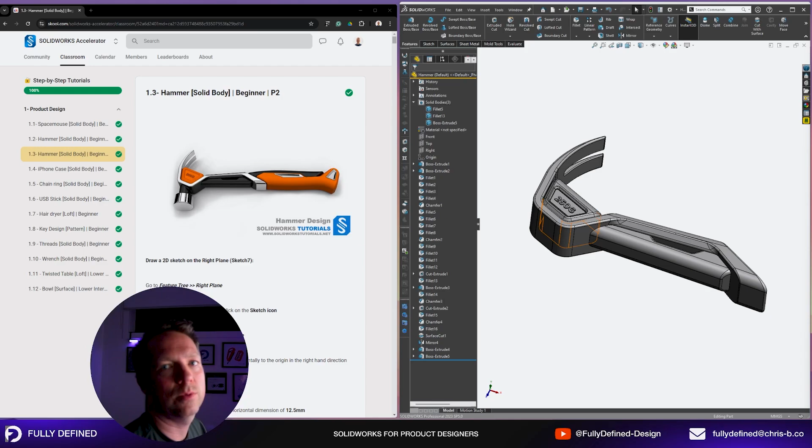All right, let's continue on. First off, I'm just going to grab all of these features and put them in a folder, label that part 1, so we can see where we started from and what we've added to get to the final image you can see on the screen.

I'll continue to do this the same way I did the first video, so I'm not going to read everything. I'm going to look at the main sketches and features and interpret that in my own way, and try to follow it as closely as I can, but if I've got some tips or advanced tricks based on this, I'll let you know.

So we're doing a sketch on the right plane here. Draw a center line. Now, before I draw a center line, I want to see why, because I know in the previous tutorial he drew a center line and then drew a center point straight slot. We don't need to do that. We can just do our slot, and we can see those dotted lines highlighted there, showing you that it's going to reference the origin, but not add a relation to it.

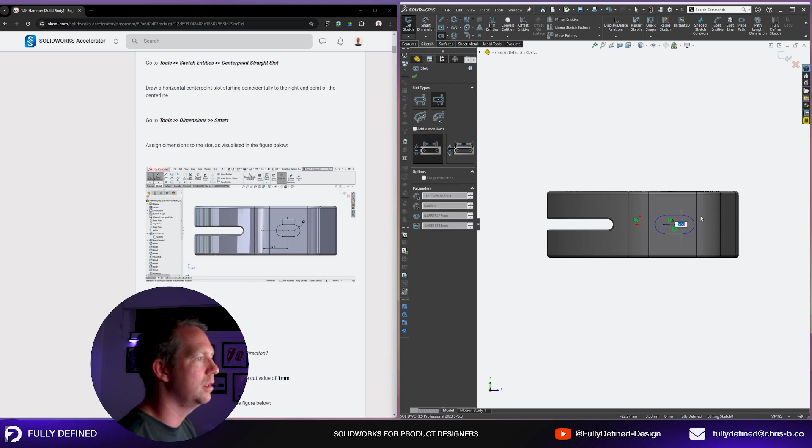But we can go in and add the relation afterwards. So I can press escape here, hold control, click on the origin and that center point, and make it horizontal, and add a dimension here. So I don't need that extra step of adding that construction line.

I'll continue to put in the dimensions, and going to do an extruded cut. It's 1 millimeter. Now, flip that direction to make sure it's going down into the object. And that's done.

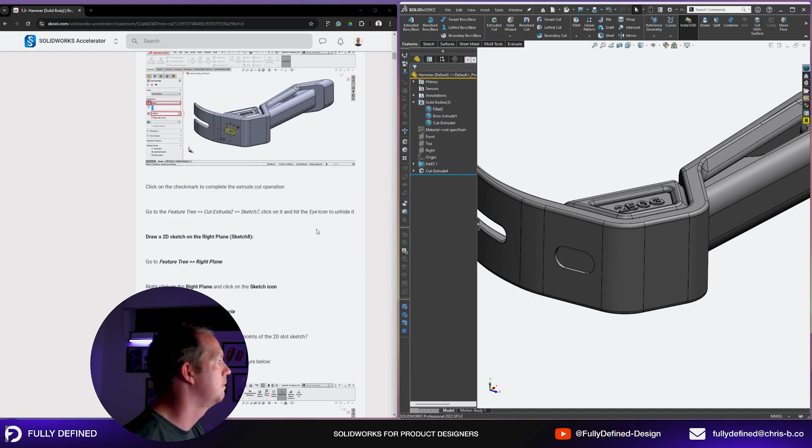Something about hiding some stuff, I'm just going to skip that, and going down to the next. Okay, so we're going to do another sketch on the right plane.

Normal To - now normal to takes me to the wrong view that I want to see here. I want to be around 180 degrees. You can change your views by pressing your arrow keys. By default it'll move 15 degrees with each turn, I believe. If you hold shift, though, it will go 90 degrees. So if I hold shift and press 2 arrow keys, that'll go 180 degrees around - there's a little trick.

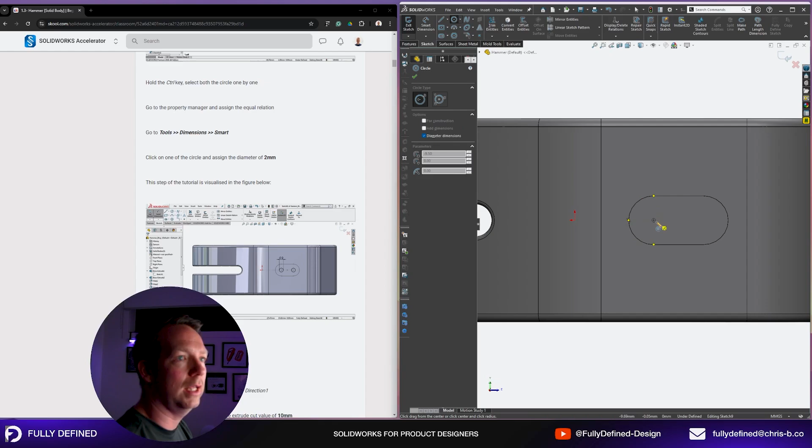Here we're drawing 2 circles, each with a 2 millimeter dimension. Now, when you're drawing a circle inside a shape that's already round, like this slot, if you hover over the edge of the slot, it's going to bring up the center point of the circle, and you can click and drop your circle onto that center point.

I'm going to select both circles and make them equal because they're both 2 millimeters. And this is an extruded cut - we're going to extruded cut that's 10 millimeters. So press 10, flip my direction, and OK.

We're doing another circle here, and it looks like we're adding a kind of fixing on the top. Again we're drawing on the right plane. Now, why we're drawing on the right plane is because it is touching this face here - this face is the right plane. But if we moved our hammer and made a change later, and it was no longer on the right plane, then this cut might not work. So if we're referencing geometry, like we want it to start from this face, it's better to sketch on this face than it is to sketch on the plane.

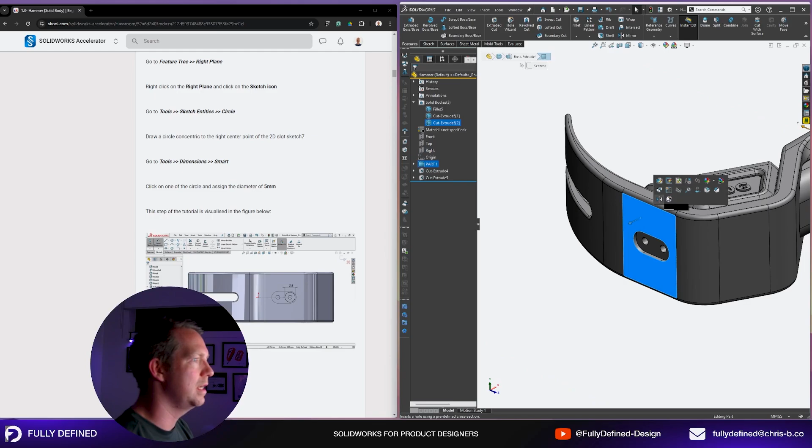So for this next step, I'm going to hit sketch using that face and then follow the step. So here, put my circle, make that 5. Extrude down 1 millimeter. Now, if I want to extrude to that surface, which is 1 millimeter away like this, I don't have to go 1 millimeter here. And if I do that and the depth of that cut changes later...

...then I'm going to either have a gap or an interference. Best thing to do here is go up to surface and select that face, and then it's going to go up to that face wherever that face ends up being. Uncheck merge result and press OK.

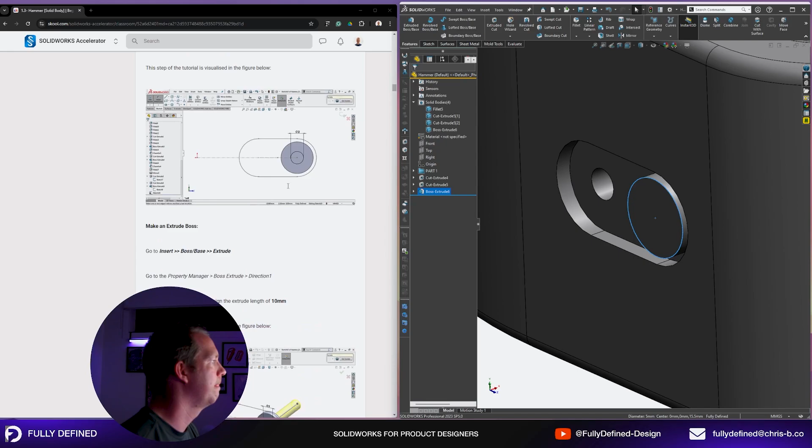Always keep going through. So we're trying to make like a pin. Yeah. All right. Now here's another little trick I can show you. If we're using a sketch, or we want to create a sketch that's got the same dimensions as something already there, we don't have to sketch it again.

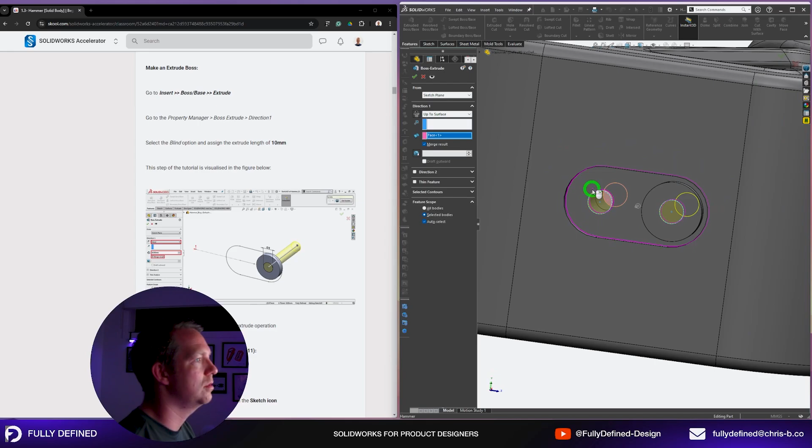We can either use the existing sketch or we can convert entities. There's no need for me to do this step here. Click on one of the circles, assign a diameter. Don't need to do that. I could actually just click this sketch here, click extrude. Again, I could go up to surface. So I could say that surface, which is down there, which is 10 millimeters away.

Now, the only difference here, I don't want to do two circles, just one. So I can go selected contours, clear selections, and just select the one on the right. It's just going to do that side. Now, it doesn't say whether or not this one is wanting to merge. He's got merge selected here in the image, so I'm going to merge it.

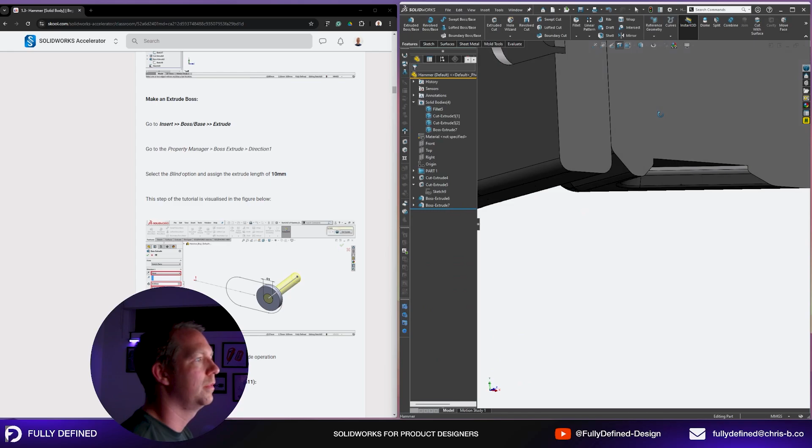But when I do, because I haven't isolated, in the feature scope, if I just move my head, you can see it's over on the right. I'm going to uncheck auto select, and then select this body to merge to. So it's going to merge to this one. Okay. So now if we do a section view that's going through that, you can see the result we've got there. This is all one solid body, going through these two parts.

All right, so let's keep going. Another circle, and what's this one? An extruded cut. So there's an error there with the dimension, I believe. It looks like a cut of 0.5 of a millimeter. And then we're going to add some chamfers. Okay, so how big's the circle? 3. So we're going to go sketch on this face.

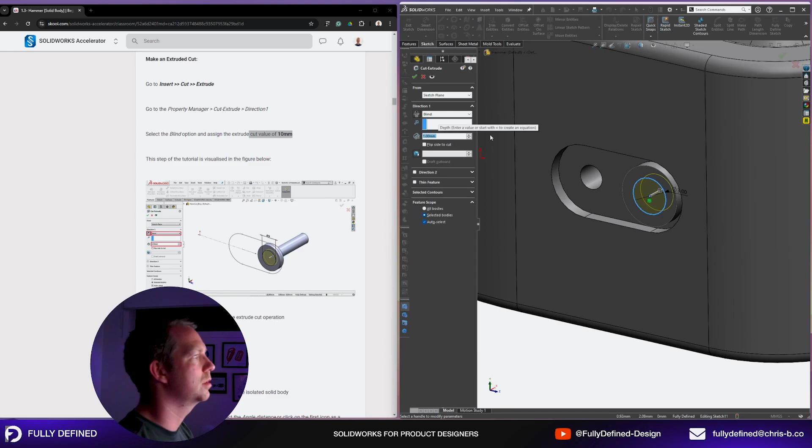There was the gesture, if you missed that: right click, drag to my circle. Find the center point. Do an extruded cut, 0.5 of a millimeter. And now I'm going to isolate that body and do some chamfers. These are 0.25 mil chamfers on one face and one edge. Select the face and the edge, select chamfer. Put in the dimension.

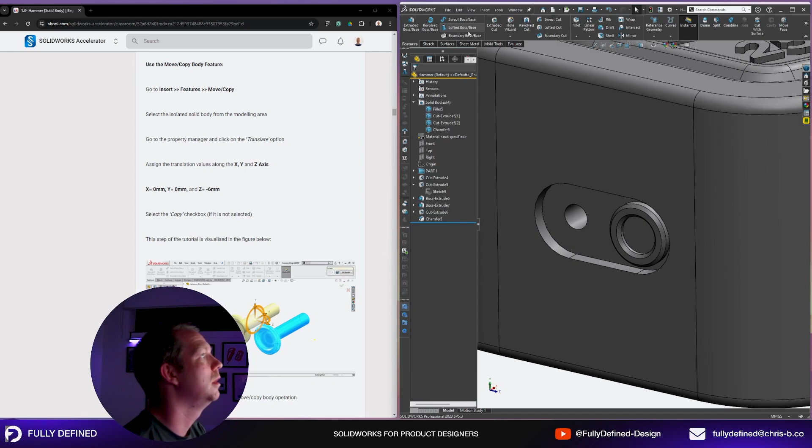There we go. And now use move copy body feature. Beautiful. I love this tool. So we're going to make a duplicate of this to line it up with this hole here. Now, this tool here, I'll show you how to do it. So insert, features, move copy. We select the body, we select translate, rotate, we select copy, we put in the dimension, in this case, -6.

Oh, sorry, the tool has changed, so you can only put in positive values. I put in 6, but I hit this little button and it's going to flip the dimension. Okay, so that is how he's done it in the tutorial. That works perfectly fine. Trouble is, if I was ever to change this cut and make this from 6 to 10, you can see those holes and those parts no longer line up. So how to fix that?

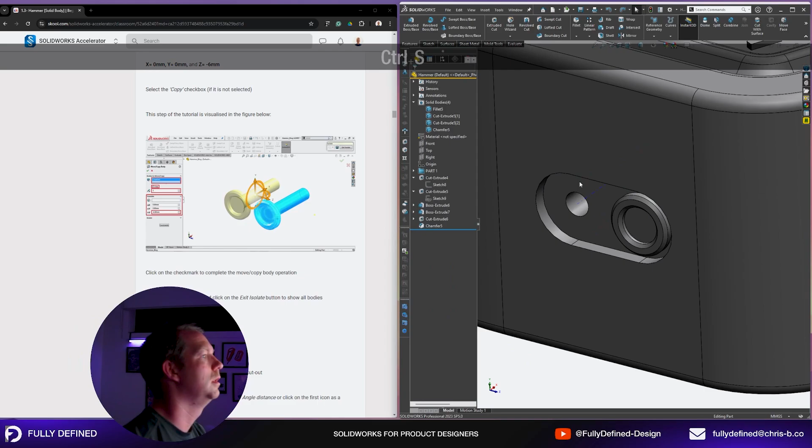Instead of doing move copy body, let's try doing it with a sketch-driven pattern feature. We'll see if this works. I'm not 100% sure if it will. Sketches, bodies, pin, selected point, this one. My sketch doesn't have a point in it, but if I put a point in it, then it might work.

Let me try. I'm going to edit this sketch, put a specific point on the center point. So I'm using the point tool. On the center point of the left circle, I'm dropping a point, pressing OK. And now I'm going to try sketch driven pattern. It's using sketch 9, centroid reference point, body, this one.

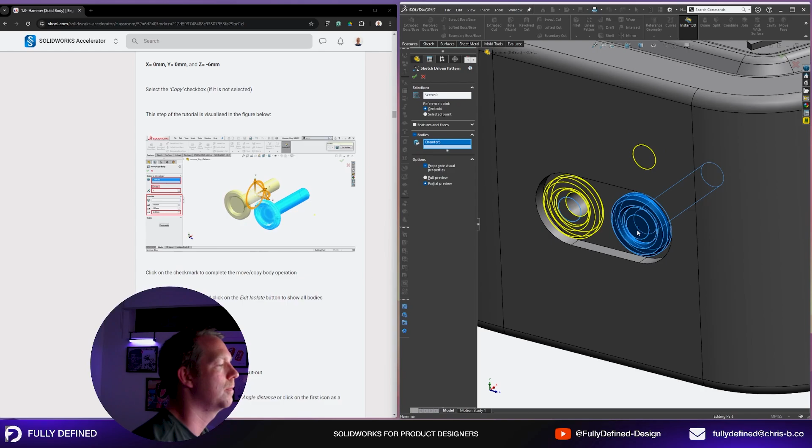There you go. So what it's doing is referencing the body that you've selected, finding the central axis of that body, lining that up with the point that we've put in this sketch. Press OK. All right. And the beauty of this, if I change this dimension, the pin moves with it. Okay. Beautiful. Let's continue.

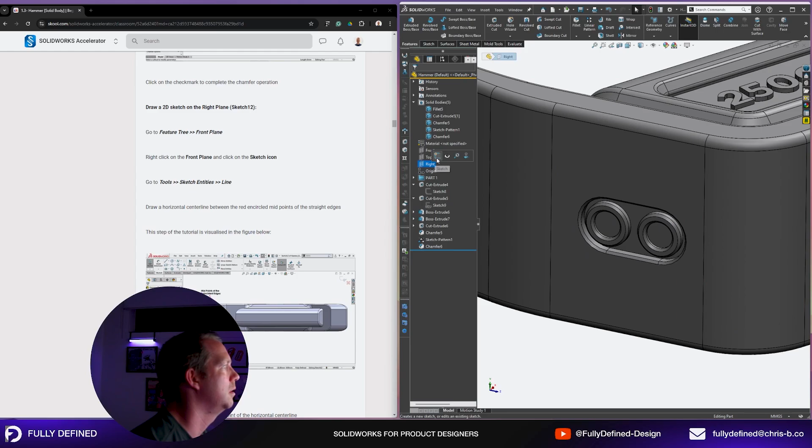Another chamfer on this edge here. 0.25. Okay, new sketch. So doing another sketch on the right plane. Draw a 2D sketch on the right plane. And then go to feature tree, front plane.

I'm a bit confused. So let's maybe just sketch on the front plane, I think. Yep, that view looks better. Okay. Now he's done two construction lines there. Now remember, my radiuses are a little bit bigger. That's why my distance looks smaller between these two edges. Okay, this is a valid place where you put a construction line, although you could just select midpoint from this one. So maybe we'll just do that.

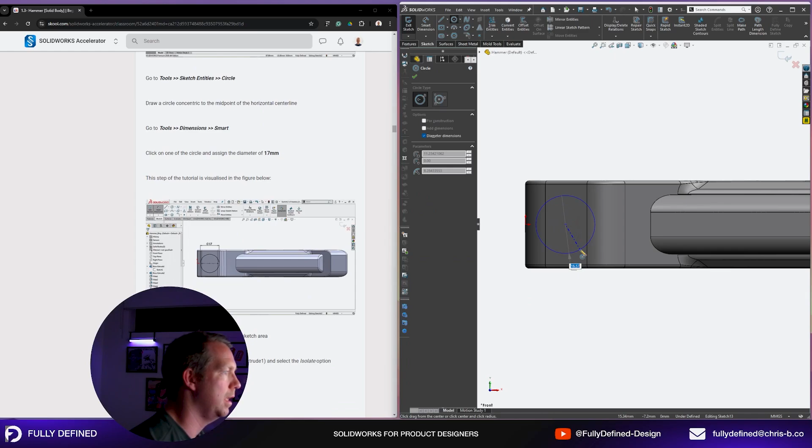So we're going to draw a circle here, 17, and then to find where to position it, we're going to use the origin, which is in the middle, and we're going to select this line and go midpoint and hold Control and select vertical. Now that 17 mil circle is in the right position. Now this one is a trickier tool here. So we're going to do a boss extrude.

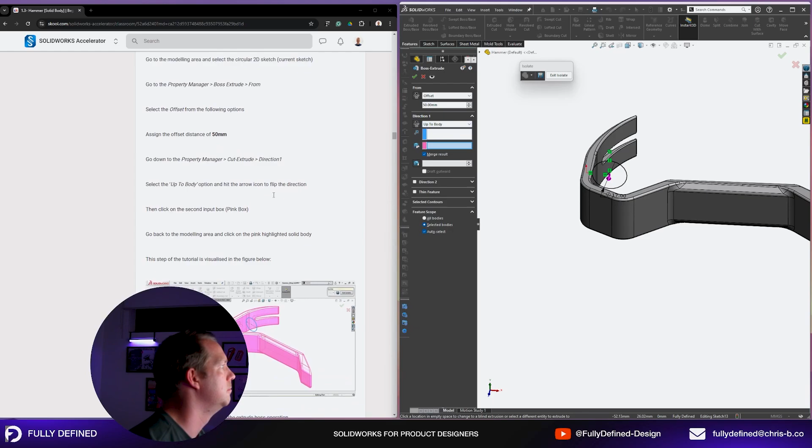We're going to change the from position to offset. We're going to offset at 50. And then direction 1, we're going to go up to body. Just to flip the direction. And then select the body here. Now I'm getting some errors at the moment. Let's try and work out why. I think it'll be because of the shape.

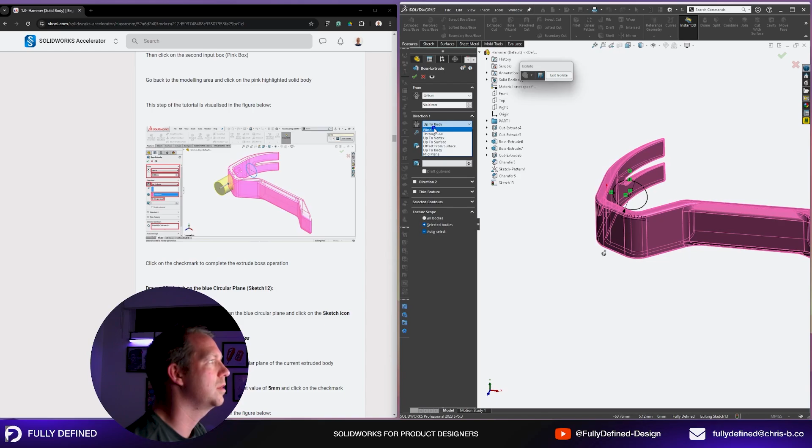Let's go normal to. Let's go to the front plane. Doesn't want to do it. Okay. All right, let's troubleshoot. So instead of going up to body, let's just go blind and see what happens. Let's try up to next. Oh, there's no next. Let's go up to surface. Okay, that option works, but you see there'd be a gap here and here. So I'm not going to use that tool. If I go up to body and I flip the arrow, there we go. So there was a problem maybe with my selection of the arrows there. So that's fine. We're going to merge that, so that's okay. And we continue.

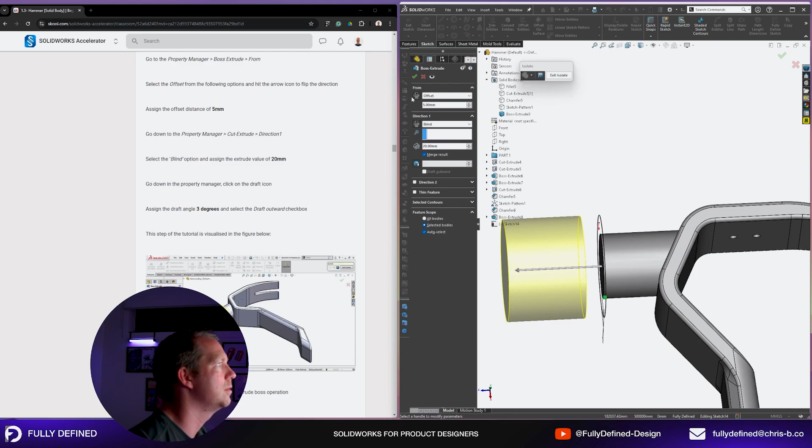So we're going to do an offset sketch. Excuse me. Offset sketch 5 millimeters. And do another extruded boss. We're going to offset this 5 and select the direction as 20, and we're going to give a draft angle out of 3 degrees. Okay. So we're offsetting backwards and then drafting out. Draft out 3 degrees. We're going to merge result.

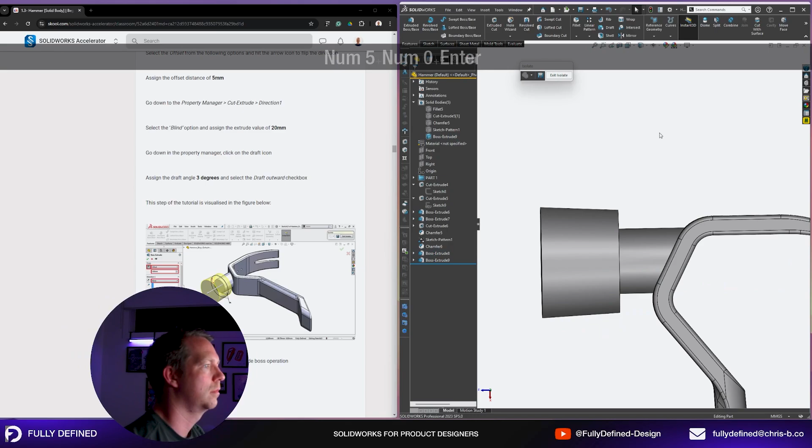Now, it's good to show you how the offset tool works, but as far as design goes, unless there's a reason for it, if I wanted to change the back position of this extrude here, the best way to do it is actually just make this 45 instead of 50. And then have this going from the sketch plane rather than offsetting backwards. That's all right though, let's keep going.

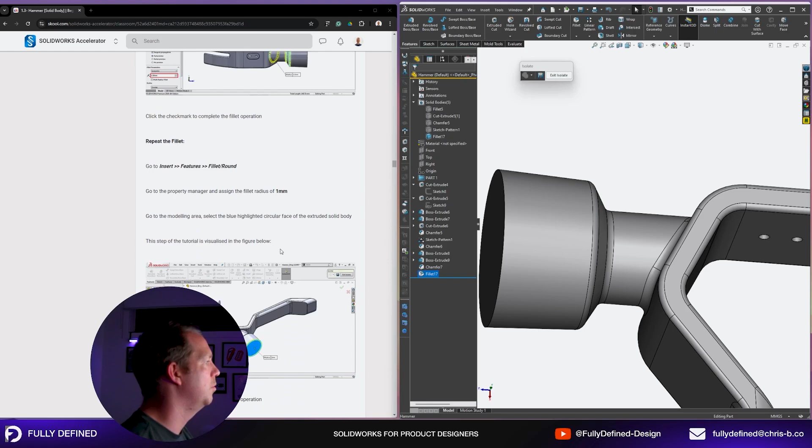Another chamfer tool, this time chamfer 5 millimeters, but at 30 degrees. And our shape looks okay. If you didn't know, if you have an issue with your chamfer, you can press flip direction and that will change which direction that chamfer is going. That looks good. We want to do some fillets, 1.5 mil. So we're going to select that, fillet, 1.5. Very nice. Repeat the fillet on the front with 1 millimeter. Cool. Exit, isolate. Make sure you save.

All right, then back on the top plane, new sketch. We're going to right click on sketch 1. Now, sketch 1 is back in part 1. And I can find it here. And we're going to right click and go, it says convert. Sorry. I'll unhide the sketch. We don't have to unhide the sketch. You just click on the sketch. You can go convert, and it's going to copy it for you.

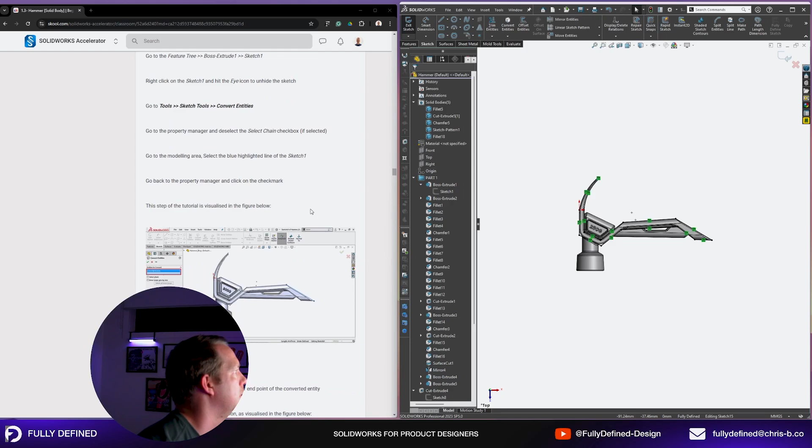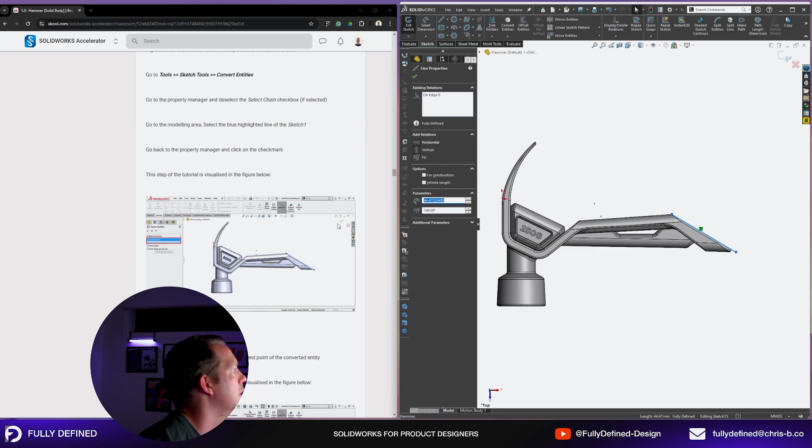And then in the viewport, select the highlighted line of sketch 1. So that's this one on the outside. Is that the only one we want to convert? Okay, that's fine. I'll just delete everything else. I've just got that line. And we're going to draw another line to make this shape. Come out, and up.

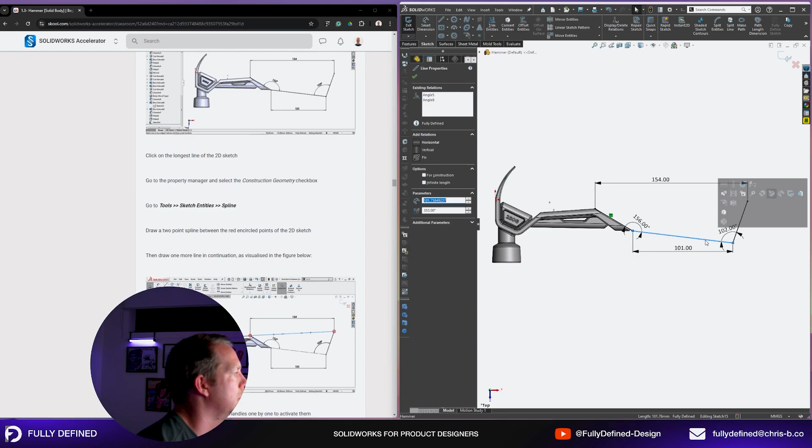Make it construction geometry. Okay. And then we'll go and draw a spline between these 2 points. So the spline tool is up here. Spline, this point, this point. Press escape. Now it looks like a straight line, but if we click on it, we can see these arrows, connection points. They'll enable us to reshape that spline.

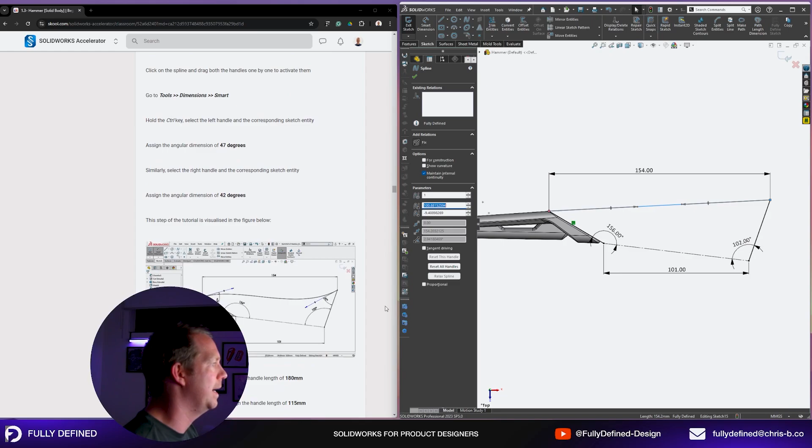So yeah, as he says here, click on the spline, drag both handles one by one to activate them. All right, so we're going to make this shape that we can see here. So I'm going to drag this one up, drag this one down, and we're going to add angles between those lines. Now, this is a bit tricky. So hold Control key, select the left handle, corresponding sketch entity, and put an angle in.

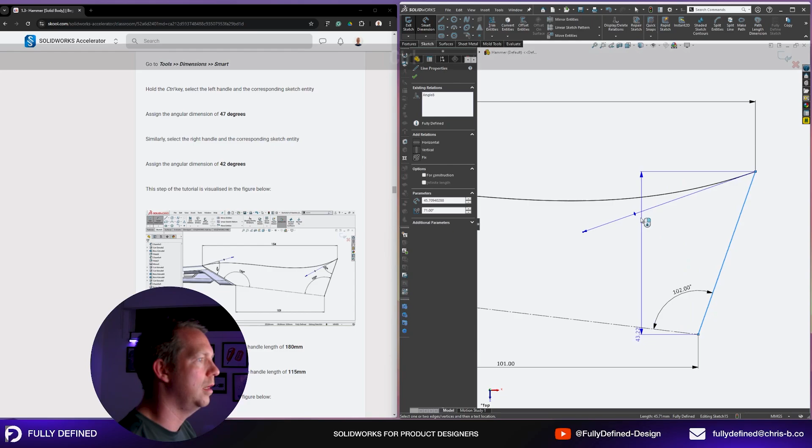All right, so let's see if I can do this. Hold Control. No. There we go. So click on that dot. We'll just try and repeat that. To be honest, I've very rarely used this tool, dimensioning with these control points. So it is great to learn something like that. Even an expert, certified expert, can learn something new from a beginner's tutorial. It's legitimate too. Okay, got those dimensions in. Very good.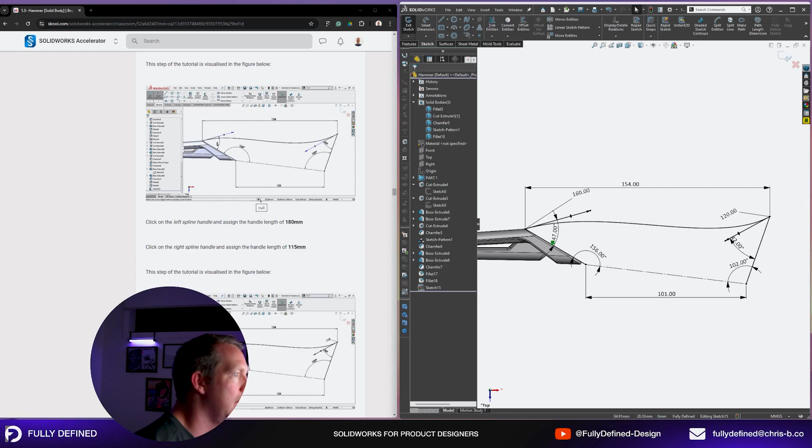Here's another little trick. You can actually control how much that curve goes. So you see how I drag it here? If you want to fully define that, put a dimension on the arrow. And there you go. Now that is properly fully defined. Same at this end. Okay? That gives you even more control. He said it. Beautiful. Yeah, there's actually here in the tutorial. So we want to now click on those lines and add in these other dimensions. So 180 and 115. Now we've got the exact shape that we want.

And looks like we'll do another spline on the bottom. Okay. So another spline here. We're going to follow the same rules. So the left spline handle, we're going to make it collinear. So this one here and this line, make it collinear, straight. And then it's kind of like tangent as well. I think tangent might give you a similar result.

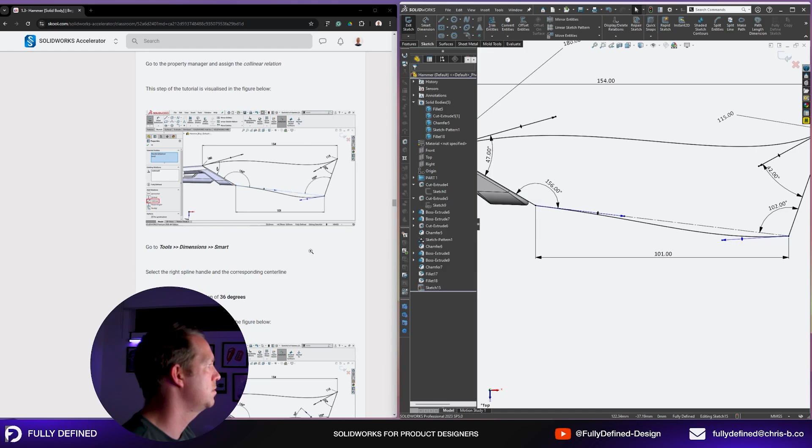And the one on the right, we'll add dimensions. Actually, we're gonna bend that up. Is that right? Yep. Bend that up. So that's going to have a dimension of 36. And then a length of 90 and 170. Excellent. That's looking awesome. It's looking really good. Okay, I really like that use of the splines on that in this example. Really neat.

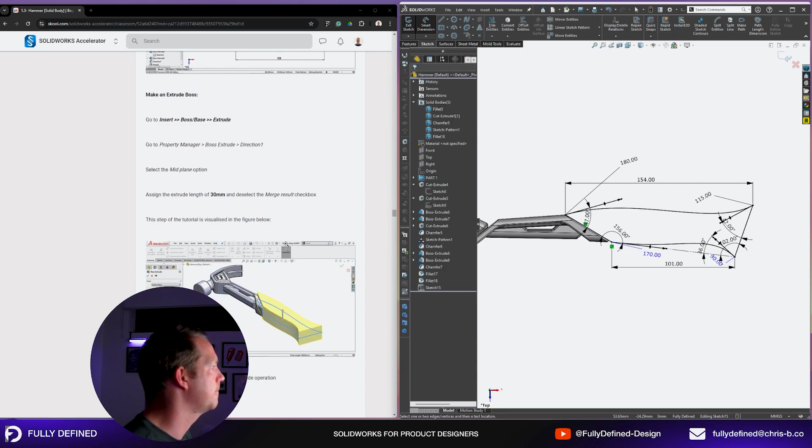Okay, so extrude mid-plane, 30 millimeters. We are going to unmerge. And we're going to add some fillets. So we're going to go 10 millimeter fillets on these three edges. Nice. Now, you can see it's a bit funny here, right? That edge and this fillet edge, like as a designer, maybe that would share the same thickness around the two edges, but we're not going to judge too harsh on this beginner's tutorial.

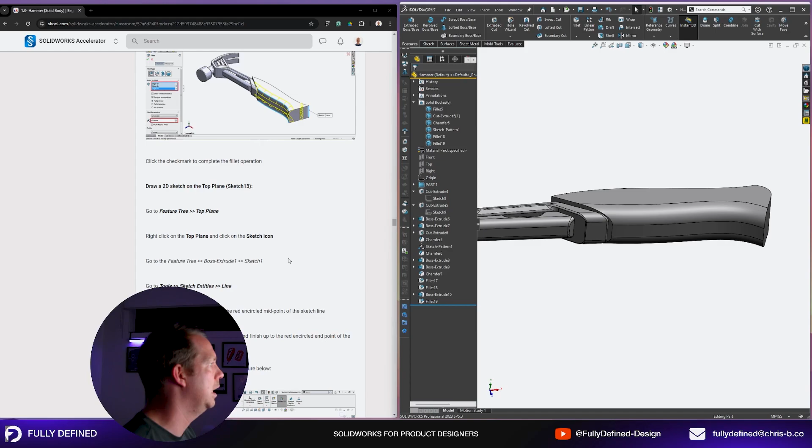Draw a sketch on the top plane. Go to sketch 1, back here. I don't think I need that sketch 1 at all. We just want to draw these lines. So the line is joining this point. So we're just going to follow the shape as I've done last time. It's kind of random. We want to avoid adding any relations as we're doing this shape because any relations we need, we'll add them later.

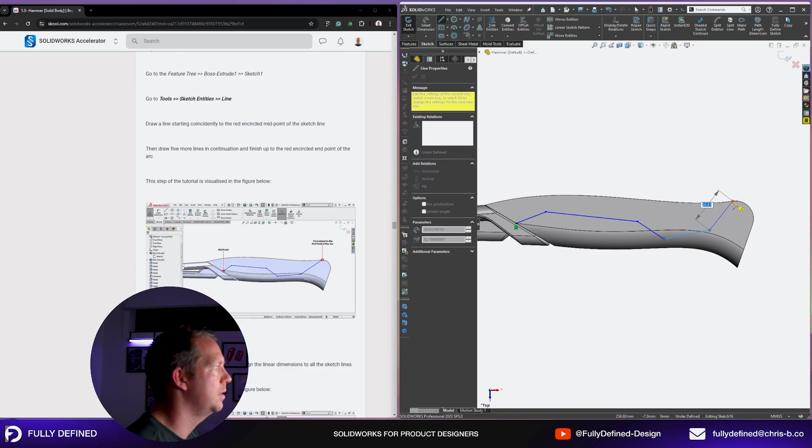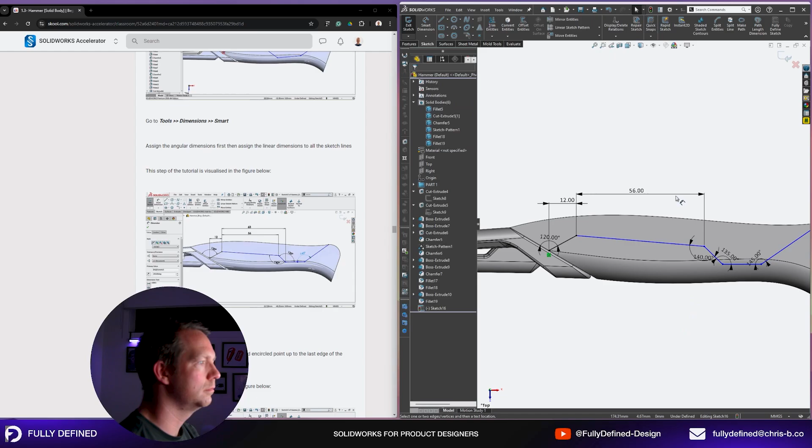And coincident to the end point of the arc, which I guess it's there, and then go through and add these dimensions. As Aryan says, assign the angular dimensions first, linear dimensions afterwards. It's a smart move. 120. And 140. 135. And that. 12. 56. Okay, it's still not fully defined.

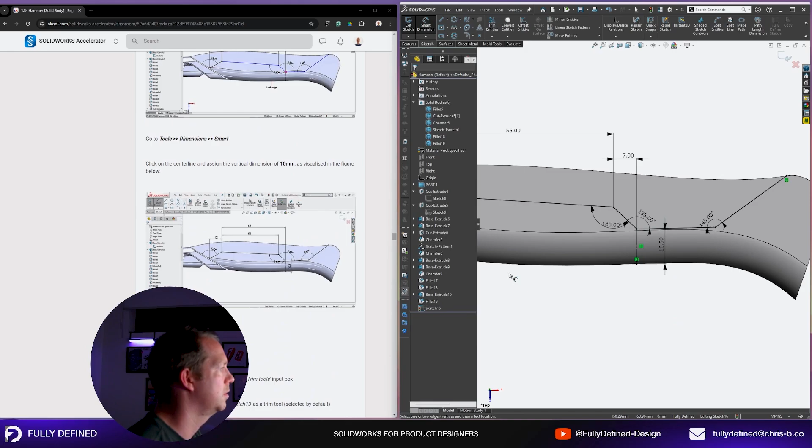Vertical center line starting from the red point to the edge to get a dimension. Okay. Make it for construction. Put a dimension in. 10.5 in the image, so I'll use that. It says 10 in the text. Maybe we'll put 10 in. Okay, now it's fully defined, looking good.

We're going to split, use the split tool. Insert mold, split. Okay, what we're doing here is we're separating it in half. Now I use split all the time. That's why it's on my command manager up here. If it's not there, you go insert, features, split. Now the body we want to split is this one. Press cut bodies. Select the two bodies. Make sure consume cut bodies is unchecked. Press OK. It's just going to split that in half using the sketch that we had. So now I can see I've got one body and a second body.

Okay. This phase of the tutorial is definitely a bit harder than part one, which is good. We're going to go and put some chamfers in. So right click on the lower part and select isolate. I think that's this one.

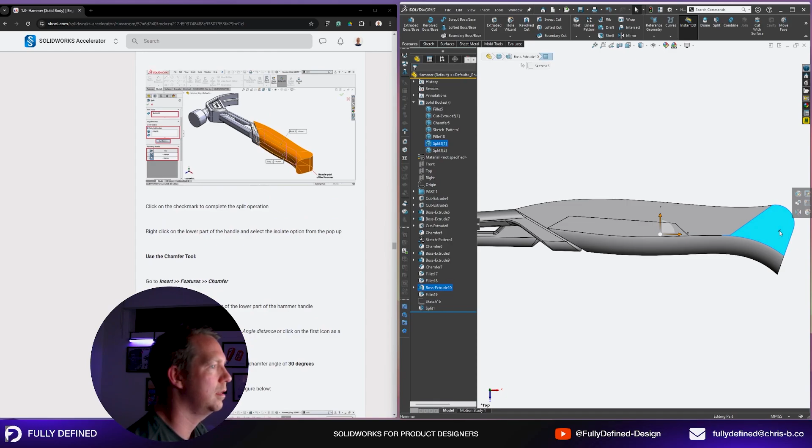And then we're going to do some chamfers. So I want to do some chamfers on these edges. Make sure we need 30 degrees, flip. Okay, it doesn't want to do it that way. Let's try this way. Flip. 4. Okay, so different numbers. Let's try 4. Flip. No, it doesn't want to work.

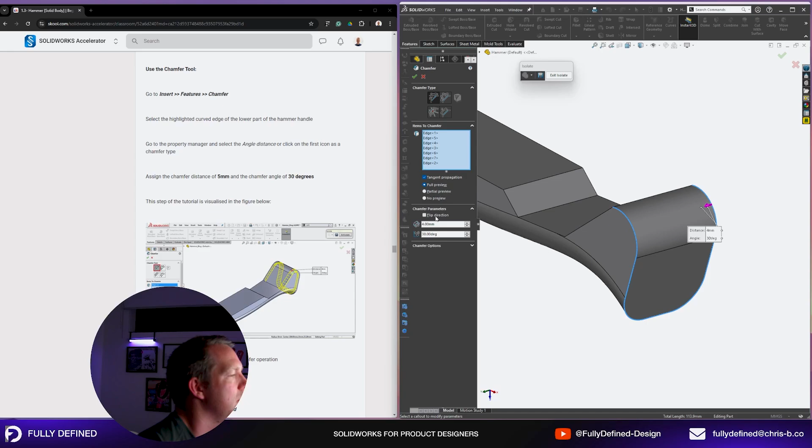All right, bit of troubleshooting here. Let's select all the edges. Just cancel that, right click and go select tangency. Flip direction. Okay, that doesn't work. Here's my next troubleshooting tip. Reduce the size of your chamfer until you get something that you can see. If you're still getting nothing, then there's a bigger problem.

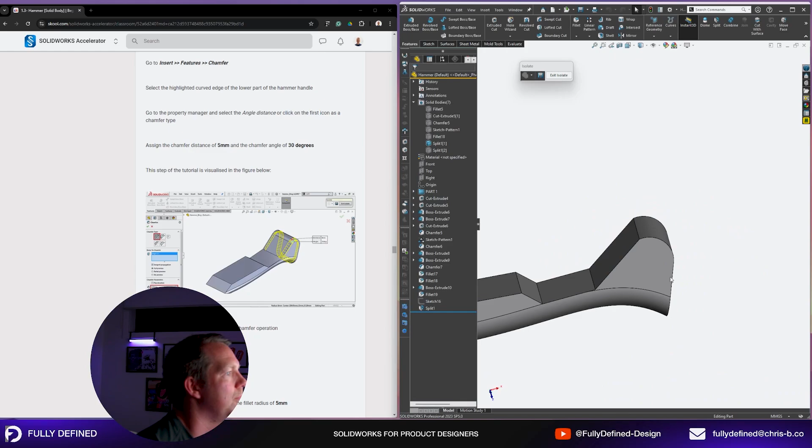Now, maybe I need to do one more edge here. I need to make sure that my edges are all pointing the same direction. I really think this split here, see how it's a sharp edge? That's really impacting our ability to do this chamfer. So I'm going to go back a step. I'm going to edit this sketch. And because it's like we're splitting right on that point, it's just kind of awkward.

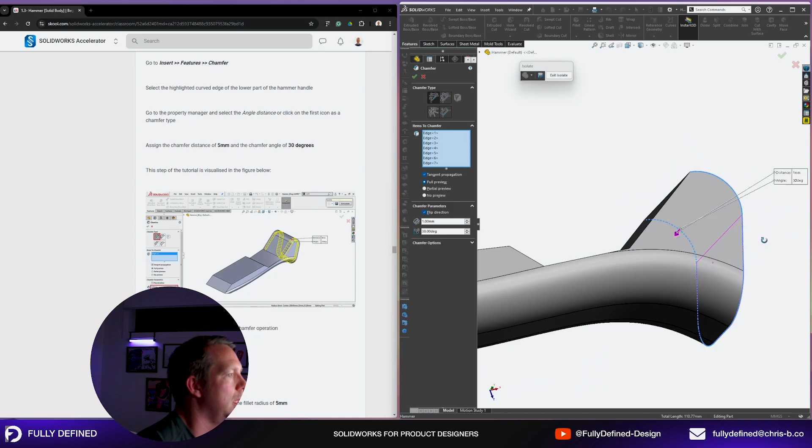I'm just going to move this point here, see if that makes a difference. Now, that point there is the top edge. Let's check now, see if we get the same result. 1. Okay, still doesn't want to do it. Could not build a chamfer due to geometry conditions. Yeah, it's quite a hard edge.

So is there anything we've missed in the tutorial? You always want to just go back a few steps and see if there's anything you missed that might be leading to some problems that you're having. So that looks like I've just moved that point, but that hasn't made any difference. So I'm actually going to undo that.

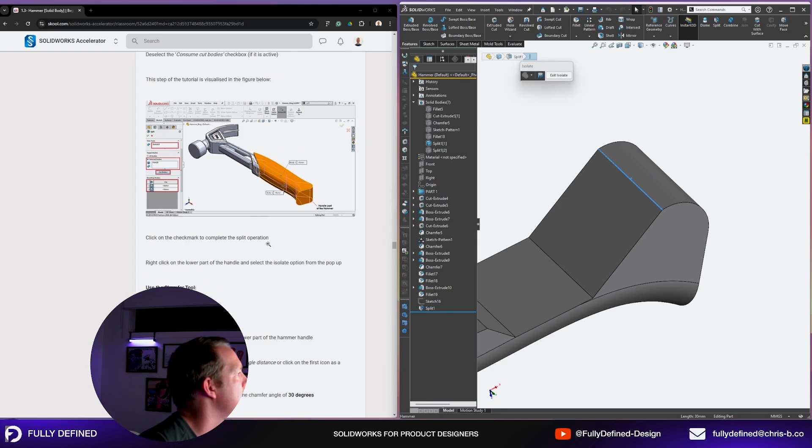Chamfer. Chamfer comes all the way around. See, in his model, it looks like a really nice fillet that comes all the way around, like it's a nice smooth edge. And there's no fillet done between this split here and the chamfer. But if that had a nice fillet on it, this chamfer is probably going to work. So why don't we just put a fillet on that edge?

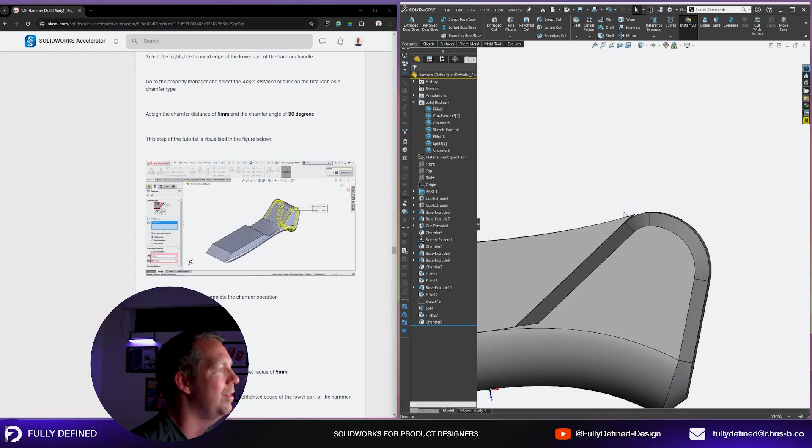Just 6. And now I'm going to select 1 mil chamfer. And now it works. And now I can go up to 4. And that works. So it's really to do with that face and how that geometry works. Now, if I exit isolate and we have a look, you can see there's a little bit of a weird gap there, but for this tutorial, let's not worry about it. Let's keep going. Continue with these fillets.

So, going to put them on 1, 2, 3. That plus the chamfers. Okay. Repeat fillet on the outside. This is a 3 millimeter fillet. Just reduce that. And then repeat. And this one is a 1 millimeter fillet.

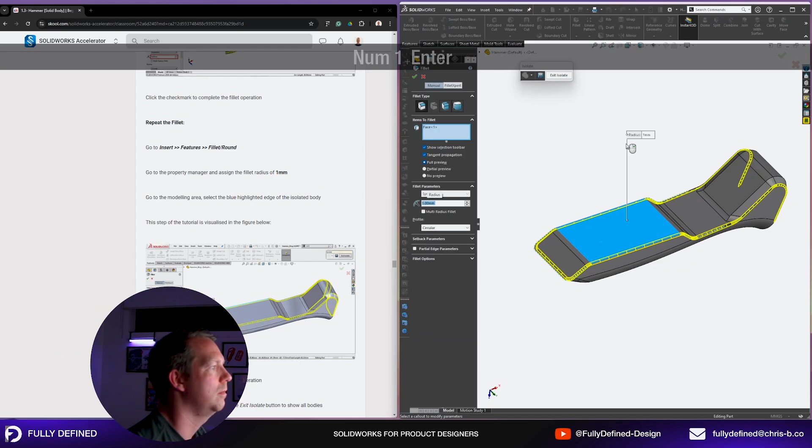Filleting is addictive. When you're starting out, you can put fillets everywhere so easily. It's fantastic. As you become an experienced designer and user, you realize that unless they're for major parts of geometry, fillets are really the very end detail that goes on your parts, as you're removing sharp edges before something is made in injection molding, anodized, or made from aluminium. Maybe it's machined. You're just taking some sharp edges off.

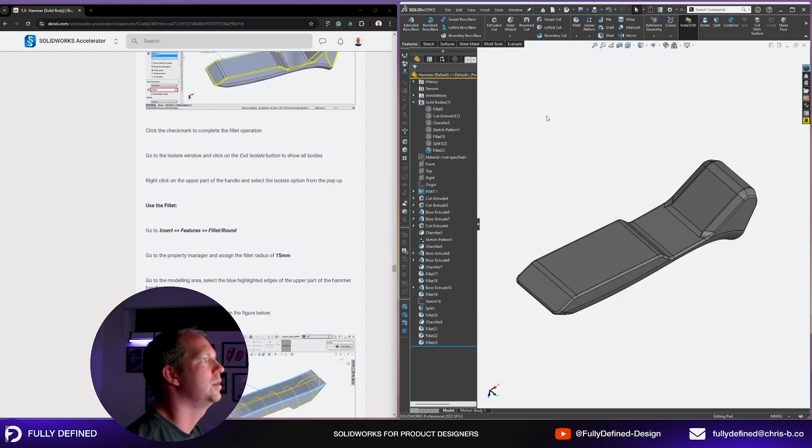All right, let's continue. Exit isolate, show all bodies. And now we're going to isolate the upper part of the handle. So that's this outer part here. So we'll just focus on this one now. Starting some extra large fillets on the rear. Select those edges. 15 millimeter. Chamfer 5 by 30.

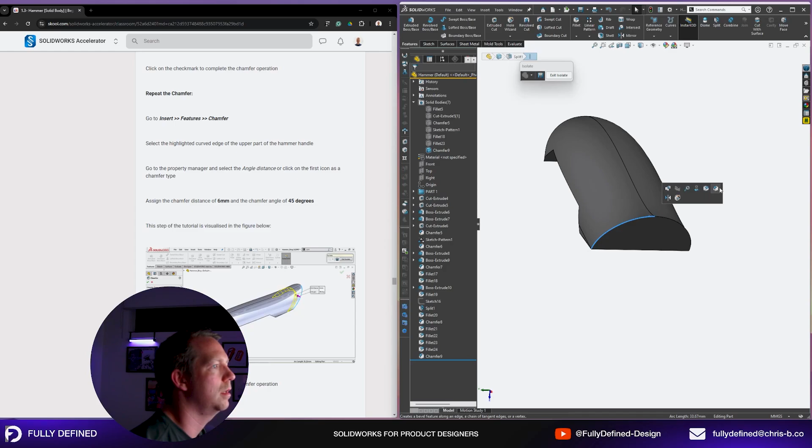Now, depending on your direction, you're going to get quite different results. So make sure you get the right direction on that one. And repeat the chamfer at the other end. Different dimension. So it's fine to have 2 separate chamfers. And then another little chamfer on this edge. So chamfers and fillets are great ways to remove material quickly without fuss.

Can't be sure which way it's going, so we'll use that. And then some fillets, more fillets. So I'm going to go 1 millimeter.

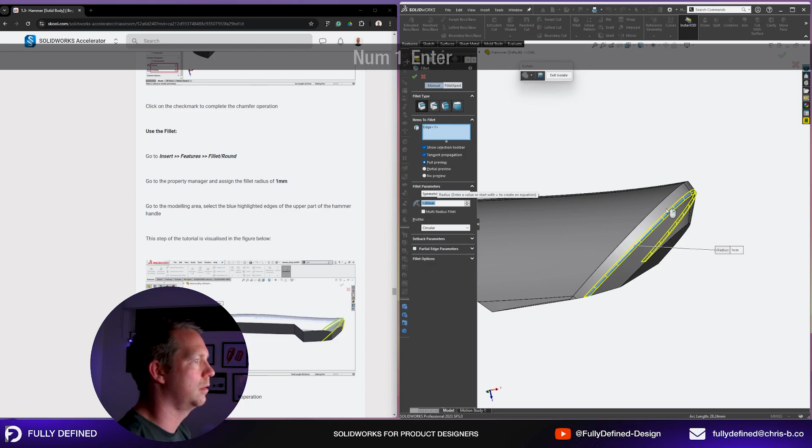One. And then some fillets on the underside. I'm using 1 millimeter. So you can either click the fillet tool first or click the edges first, then click the fillet tool, then put in your dimension. That works. Just going to save.

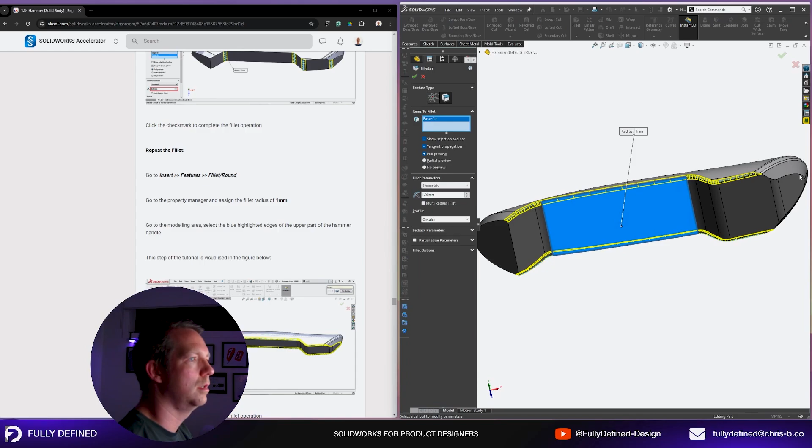Another couple of fillets. That one didn't do all the way around, so just make sure that we're getting those edges as well. Okay. All right, exit isolate, show all bodies. Okay, now just see how we've done.

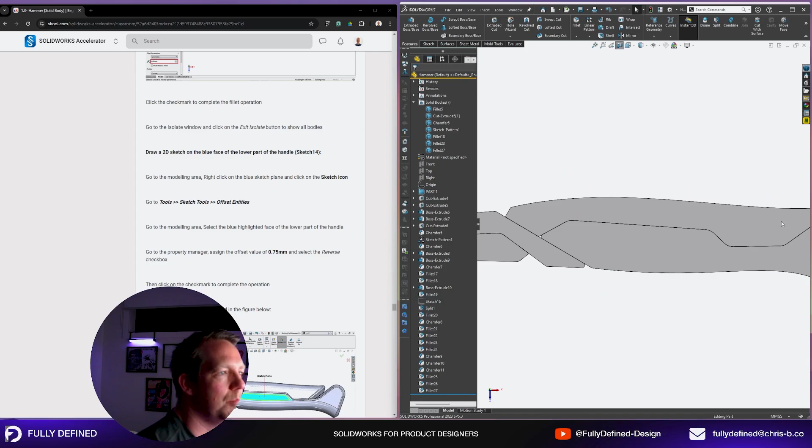We look at a section view through this thing. We can see how we've done this split between these two bodies here. So we did a split with a straight line, and then we've gone through and done fillets on both sides separately. So multiple fillets. What you could do, if you have your design intent, is put your fillet in the sketch. So these fillets here, which are all 5 millimeters, I can edit this sketch.

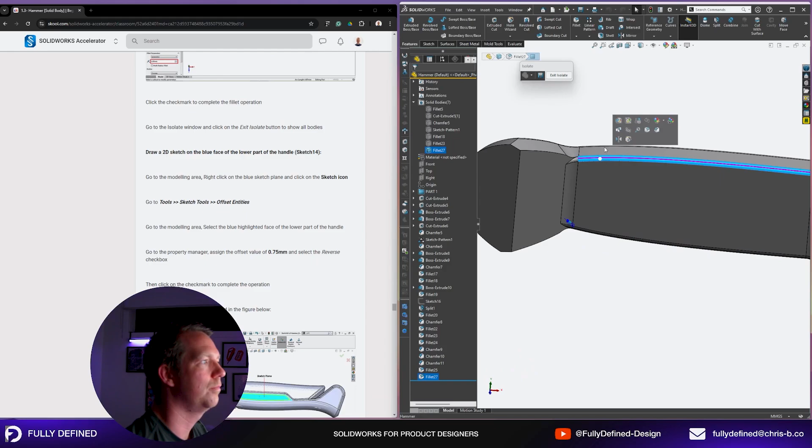I can change, grab all of those, put a fillet in, exit. And when it does the split, it's going to split it with those fillets already there. So I can actually skip those. Okay, I've got essentially the same result. I have to clean up this fillet here, but that's no problem. Just clean up that one. There we go. Yeah. So there's all these little ways that you can reduce your clicks, your effort, get the same result.

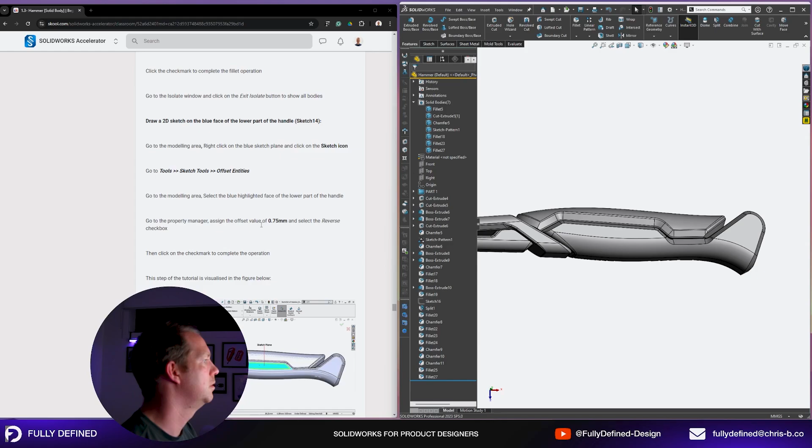Okay, so draw a 2D sketch on the blue face of the lower part of the handle. I believe we're looking at this section here. So it's flat, right? So any flat face we can draw a sketch on. So flat face, offset 0.75, inside. And then we're drawing a line somewhere in the middle. Doesn't really say where, just anywhere.

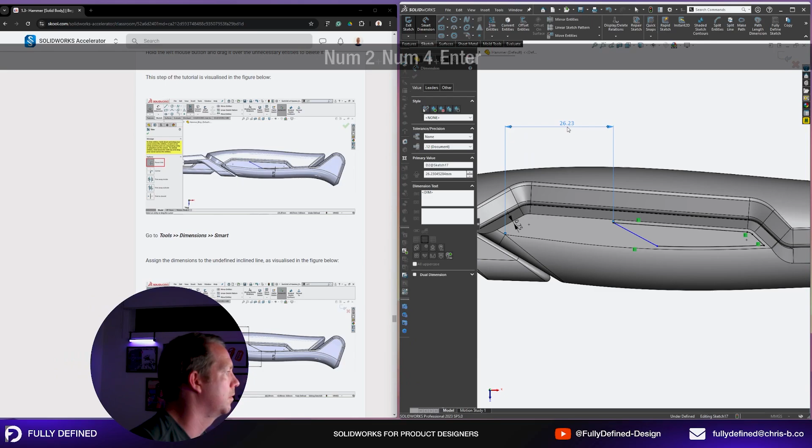And then power trim. So power trim, T-tool for me, power trim's the top one. I'm just going to trim away all this stuff up here. Get all those lines, add some dimensions from here. Okay, looking good. Extruded cut, 2 millimeters. Okay. 2 down. Now he's highlighted here, select contour. I didn't need to do that because I only had one open contour in my sketch. Everything else I deleted or removed.

Now some fillets. You had a draft, so I didn't see that. So add draft, 45 degrees. Yeah. Okay, that makes it a bit more of like an angled cut on the inside. Okay, so now we're going to do a couple of small fillets on this edge, this edge.

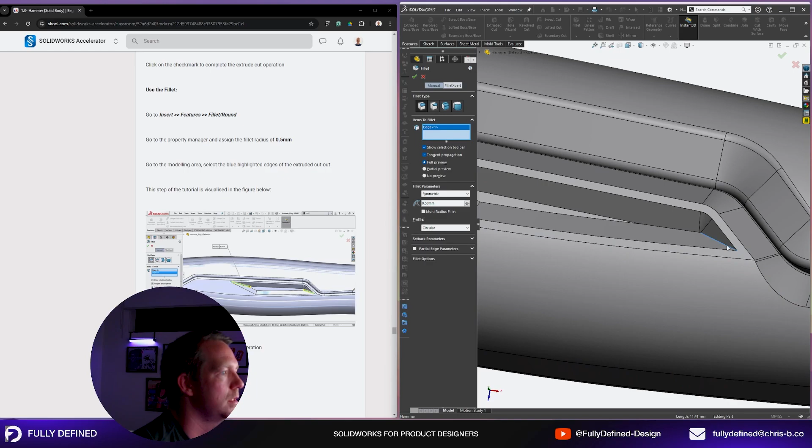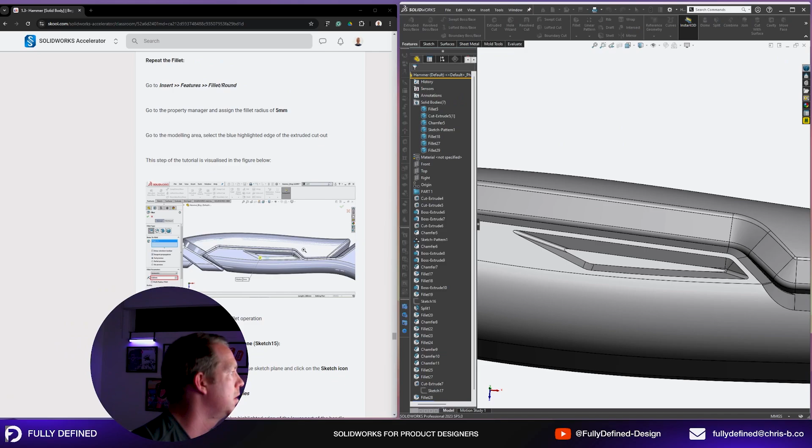My shape looks a little bit different. It's hard to explain why, unless my cut was a bit deeper than his. Maybe it was. Let's reduce it. Looks better. 1.5 maybe. Yeah, it's pretty close. Repeat fillet, 5 millimeter. Okay, I think we're leaving that part.

I would like to add more detail to it and just clean it up a little bit. The way I'd clean this up, a couple more fillets on the bottom and those side edges. So that face, that face there. Okay, now at least it's kind of smooth all the way around. Okay, let's go to the next one.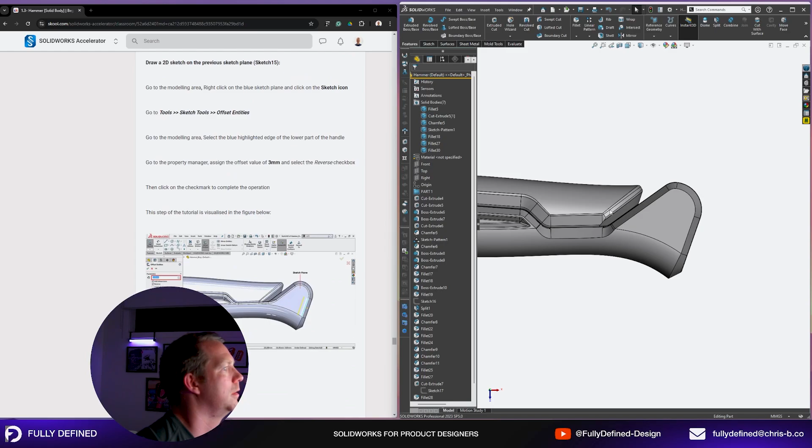We're going to select the face. Where are we sketching? Let's draw it here. Let's offset this 3 millimeters. Drag the ends and then give them some dimensions. He's got a fillet around that edge already. I don't have that fillet. We'll come back and work out where that's from. 3.5. Okay, I'm just going to accept this sketch.

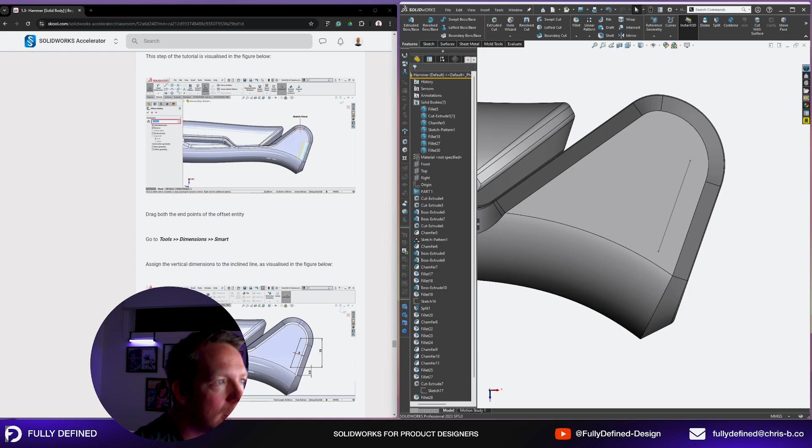Okay, so you can see the fillet that's around this edge here. Sorry. Yeah, I don't have that. So let's just scroll back. See where we missed it. It was on the other part. The first part, this one. Yeah, maybe when I redid the split, whatever fillet I had here hasn't continued around. So I'll just have to edit that. Just make sure I'm getting that all the way around. I think that should be better now.

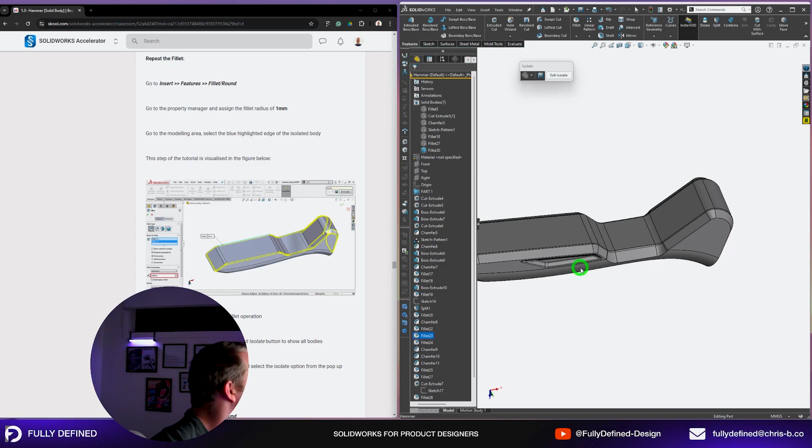And I also didn't do both edges. You see how I've got the chamfered edge? I think it's kind of skipped over. It's missed in the image, I believe. Yeah. That fillet there, it's on the outside edge. So we're just going to add that in. No biggie.

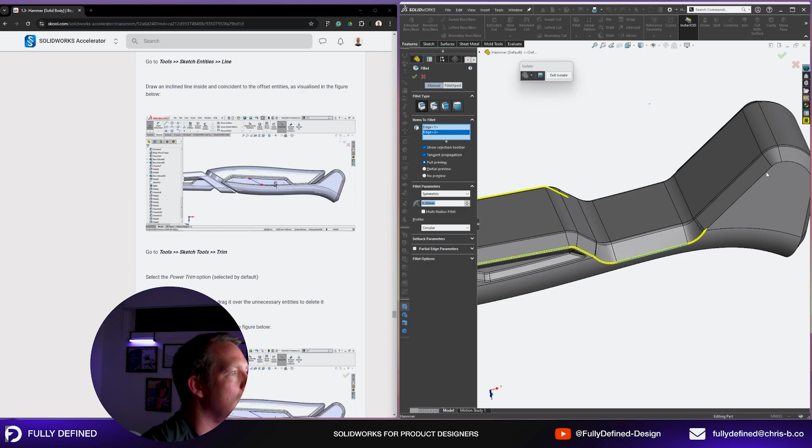Just roll above that. Put a 1 millimeter fillet here. Oh, it's too big. 0.5, 0.3. We go all the way around 0.5. Okay, there we go.

All right, we're nearing the end. Now, back to this offset sketch. We don't need to delete the sketch, we can just redimension it from this line and then put our dimensions in.

You can see his fillet doesn't even go around that sharp edge at the bottom. Again, it's fine, it's slight differences here, but that's okay.

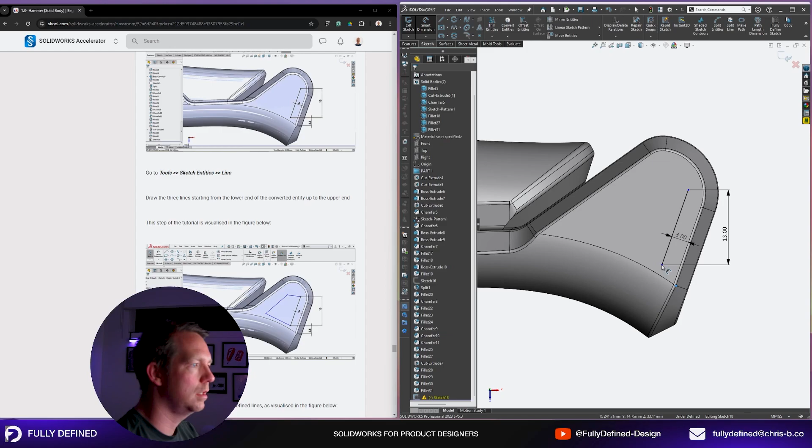3.5, okay. And then this one's just drawing a shape, so let's draw the rest of that shape. About that. Angle, angle, angle, and smart dimension: 70, 74, 12.5, 10.5. Okay.

And do an extruded cut with the draft angle of 50. So 1.5 down, drafting 50. Okay, and it gives you that kind of chamfered look.

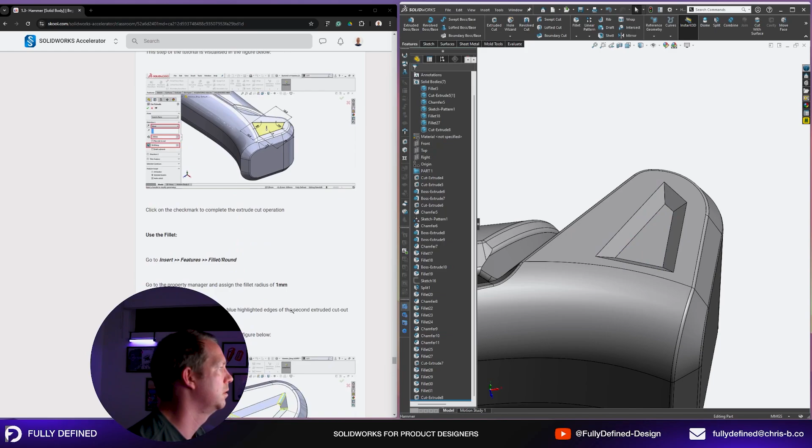And then some fillets. I'm going to do all 4 fillets at 1 millimeter, and you're going to mirror that. I'm mirroring both. Okay. Before we do that, let's just put another fillet on these. There, that's nice. Okay, so let's work out what we want to mirror.

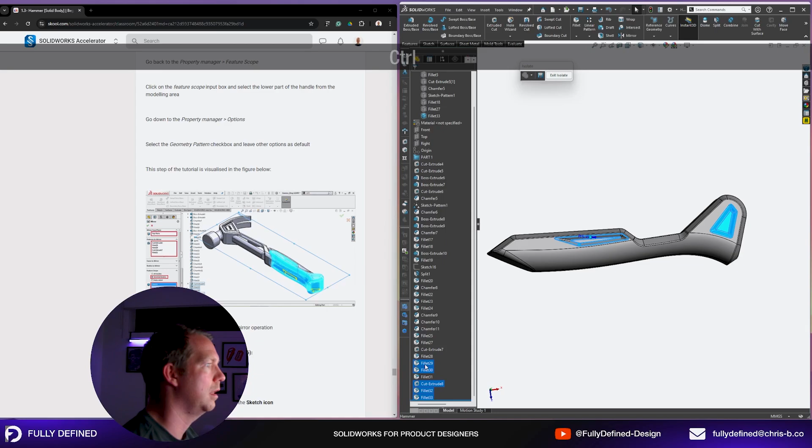That fillet, that one, cut, to that, and that cut. And then we go and find a plane, which is top plane, and we go mirror. Okay, beautiful. Nice when it works.

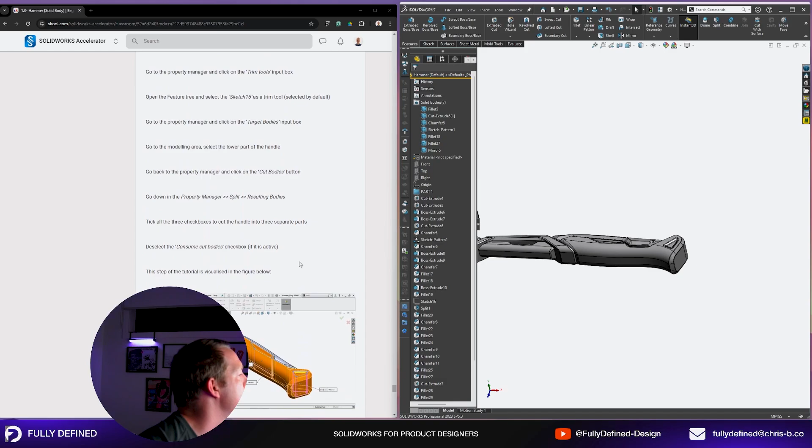Exit, all right, save. This now offset. What are you doing here? Going to split those parts, splitting it into 3. Okay.

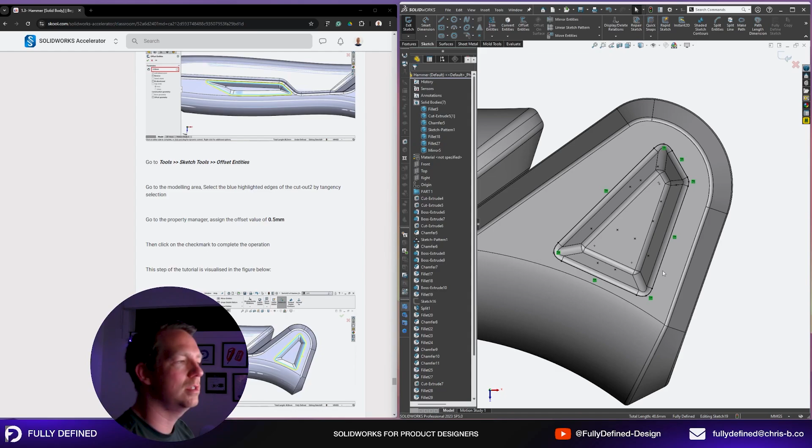So I'm going to offset by 0.5. Now we're going to get into an issue here because we're starting to get really close to that fillet on the outside edge. So the distance between that and that is only 0.25, so I'm not going to offset in this example. I'm going to convert, use that edge there, convert, and use this edge here, convert. Because I've diverged slightly from some of the dimensions, it means I can't follow the tutorial perfectly, but the theory here still works. We're basically splitting these bodies from the main body, so we'll have now 3 bodies from that one we had originally.

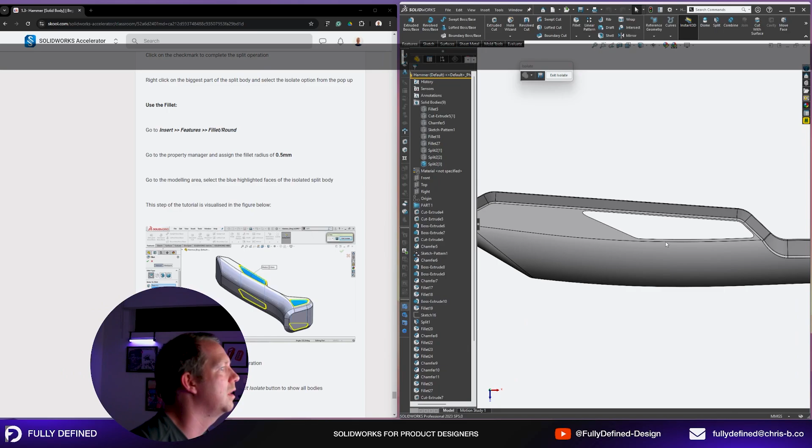And that would be to do with molding, or in this case we can change some of the colors. We can put some fillets on them. So yeah, can't really see what he's filleting on the holes. Okay, we can do that. So we're going to just isolate this body. This is a 0.5 mil fillet on both of those.

All right, that part sticks out a bit now. I don't love that, but he's got to finally put a fillet on that one. We already did that. And some more fillets, fillet on that one. Okay.

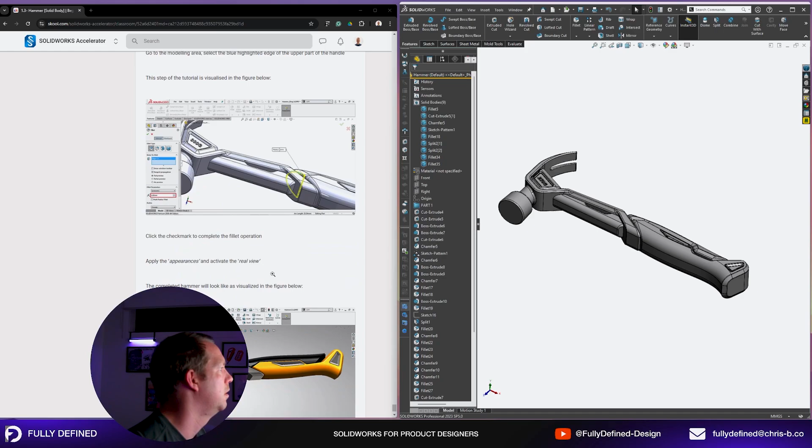Apply appearances and activate real view. Okay, well you can do that. Yeah, he doesn't do that in the tutorial.

Design credit goes to Whistle. Whistle Design, Australian made.

Nice. 2014. Very good, Ian, great pickup.

So yeah, great work. So the tutorial, yeah, 50 minutes for part 2. Pretty good. Thank you for following along if you did.

I'm not going to do the real view appearances, that could be a separate tutorial. But as far as following along from this beginner tutorial that Aryan's done, I think probably 10 years ago, excellent for beginners. The only things I'd really change, probably some of the points I brought up with splitting, with the fillets, or inside the sketch. Some use of construction lines unnecessary.

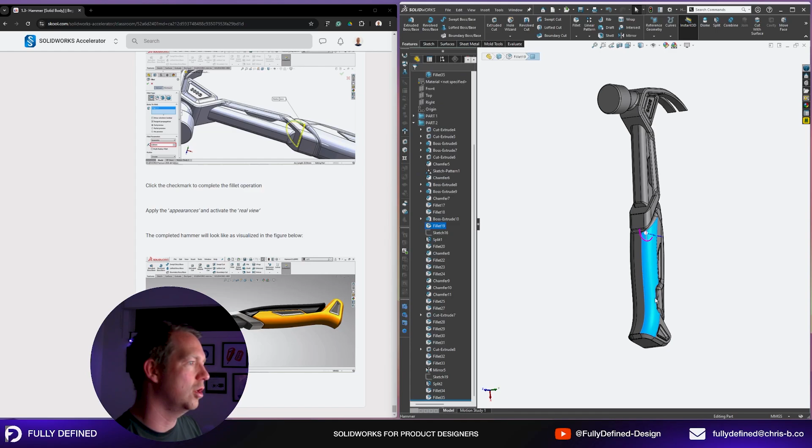You can actually use existing geometry or the origin to use as reference points. And there were a lot of fillets used, so we got up to like fillet number 35. There's a lot of filleting here to create some geometry, like these really big fillets - I've got no problem with that sort of use at all. It's all the smaller fillets where you try and consolidate those and have a more consistent fillet size across all of those details. That would work really well.